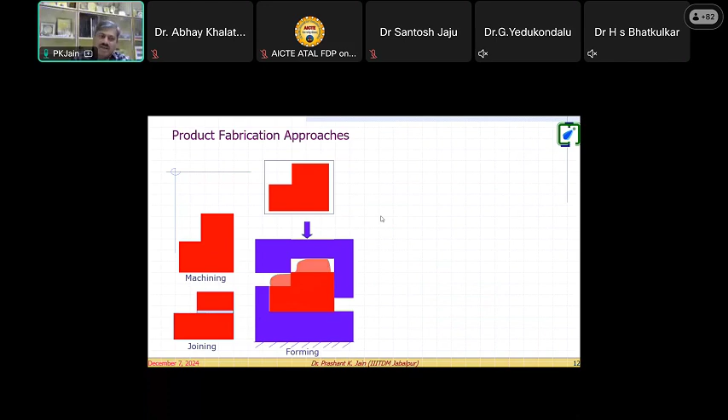We start generally for making any product. Suppose this kind of product is there. Quickly, by looking at this picture, we understand that this may require machining. So immediately the first impression is machining. Then we think this product can also be made by joining processes, soldering, welding. But the most popular and common one is forming processes like injection molding.

But now we are in the era of additive manufacturing, which initially started with layer deposition, which we called rapid prototyping. Then the most widely acceptable technical name came: additive manufacturing. Now it's also known as 3D printing. Mostly this doesn't require any engineering background - food printing, tissue engineering, many things. So not necessarily an engineer, but 3D printing is known to everyone.

So why do we go for additive manufacturing? That process allows us to quickly build a 3D model. You've already gone through this, and here is one example - this is a handpiece of a hair dryer gun. See otherwise how many drawing sheets and dimensions are required to be transferred to develop an injection molding die to create this part.

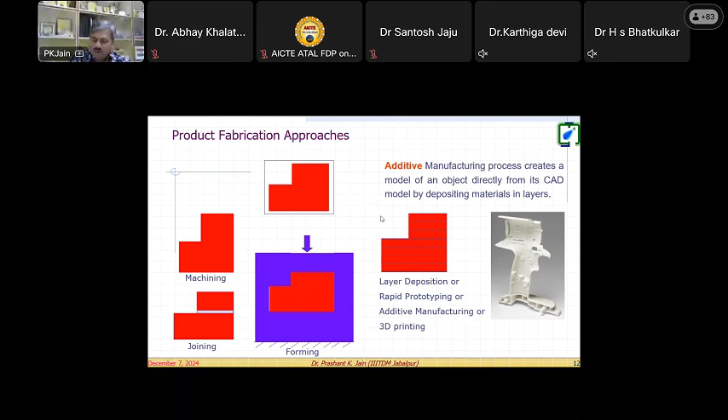Initially, when I started my PhD in 2005, this was just a communication tool to communicate your geometric model. Often we say pictures can communicate. So we started communicating to the patent office while creating a geometric or physical model, to say: okay, this is the product we are going to have a patent for.

In case of additive, the counter thing is subtractive machining. So what is there in subtractive? We are removing the material. In subtractive processes, we begin with a solid stock and carefully remove material. But the process may sometimes be very complex, exhaustive, time consuming, and the material may be very costly, so we may not even be able to build the part - see, for example, this case.

In this case, you can notice that in such areas CNC machining is not possible. Here too, CNC machining is not possible - your 5-axis CNC machine tool cannot even reach this area. So this is the removal process, and this is the additive process. Generally in such cases, we prefer to go for additive processes.

I believe during the previous lectures you've already gone through the different kinds of additive manufacturing processes. Somebody can answer these questions in the chat box, keep on writing. So I'm coming back to additive manufacturing.

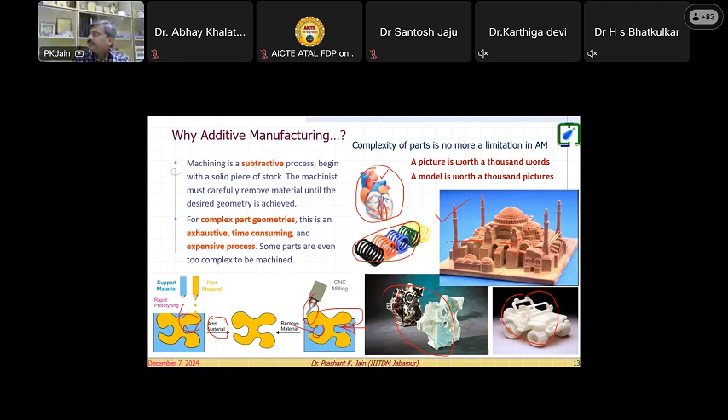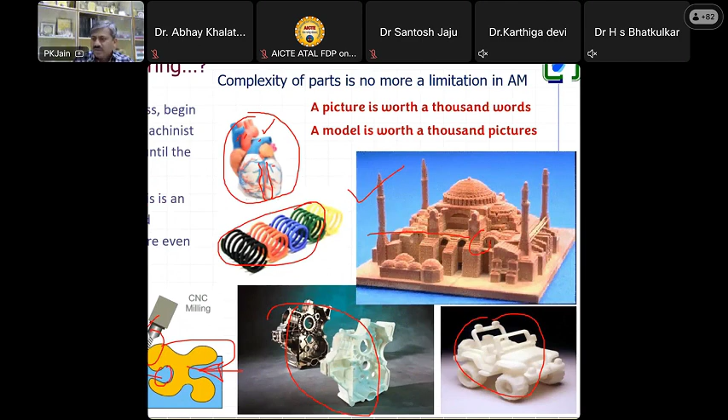So here, everything is done in a layered way. You want a cross section of an object - that is what a layer is. Like here, you can see these layers, and the stair-stepping effects you can see. Right? You can see this layer found on this object.

So we will start with the basics, where you can understand where the scope for programming is required, and why it is required. Look here, initially you want this CAD model, right?

So this model, Dr. Khalatkar, our participants are allowed to write comments. I would like to know who is using AutoCAD or Pro, or which geometric modeling software you are using. Yeah, one is Fusion 360. Please keep going, Muthu Kumar. Others can write whatever you are using - CATIA, Pro E, SolidWorks, very nice.

So here you see this CAD model is required to be created in any of the solid modeling packages - that may be SolidWorks, Fusion 360, AutoCAD, ZWCAD, Solid Edge, or CATIA.

Now the second step is slicing of the model. Slicing means you need to cut this model. This model cannot be cut by a knife because it's a virtual model - it is in a computer. It is a mathematical model available in your computer system.

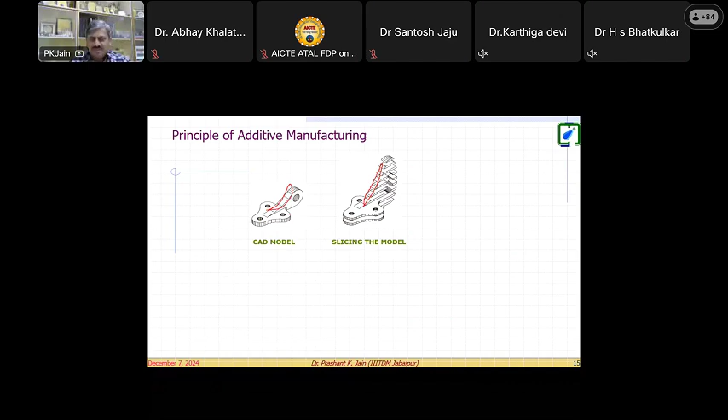So notice here, these are the tapered edges coming. These tapered edges occur because this model has a sculptured surface, so we need to square them. Now you see here all the layers are in a cuboid form, a prismatic form.

Once we get these kinds of prismatic forms, the layers mean this contour information. So suppose I select this area or this area, you get this kind of contour information. This contour information is required to be stored in your computer system - that is the objective we have to fulfill.

This is one contour at this side, here is a different contour, here is a different contour, and then successive layers - as we keep moving in the Z direction, upward direction, this movement occurs and the contour keeps changing. Our objective is to find out this contour, okay?

Then we will move to the nozzle path - I am coming to the process. So next step, once you get this prismatic information, you need to join them. Pasting is required - we call it stacking or pasting, okay?

Then you have the physical prototype, and this physical prototype will be in this form. What happens - you started with this CAD model, very smooth, but you end up with this staircase model. So what is happening? These stairs are an inherent characteristic of the process, because everything is done with layers. So any layer will be in a prismatic form, a cuboid form, so stairs will be generated.

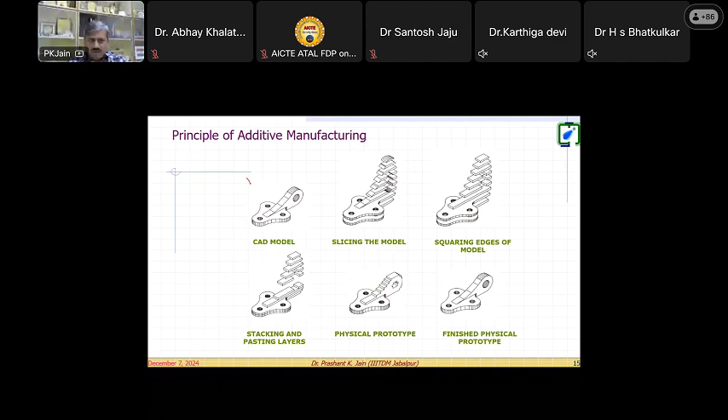Now see, because your desired model was this, but you are receiving this, so you have to move to post processing - a lot of grinding, surface finish, polishing, or some other things like selective melting. Dr. Taufik might have discussed with you the selective melting processes to get this model. So our objective is to get this finished physical prototype after the post processing.

So let me come to the process here. What we have done - we have created the geometric model, then we have done the tessellation. Any idea of the tessellation?

Quickly you can write in the comment box, any idea of the tessellation? What is the tessellation? Okay, STL file, okay, anybody else? Tiling, okay, anybody else? Sudhir - tiling, okay. Triangles, okay. So basically the triangles or STL file is the output, you can say, or the presentable form of the tessellation.

Tessellation basically tells you the piecewise approximation of the surfaces. Suppose this is the cube you have, and we piecewise approximate it. This surface can be anything - triangle, square, pentagon, hexagon, or anything. But finally we land out with the triangle. Why? Because the triangle is the simplest geometry, the lowest side plane. To create a plane, what we require is three points. We can also have other shapes, but for the minimum plane to cover maximum volume, it's the triangle. So that's why piecewise approximation is done using triangles.

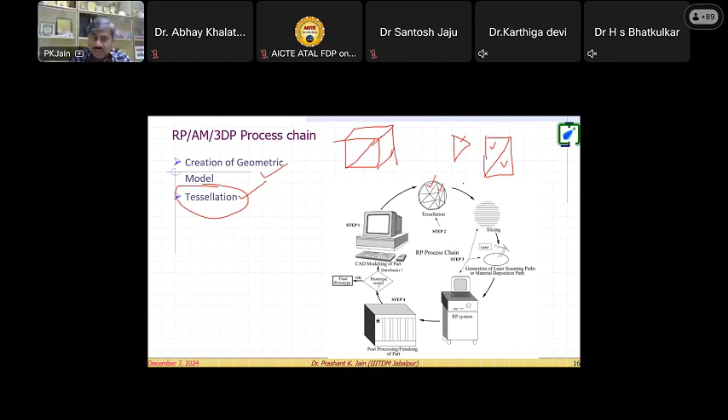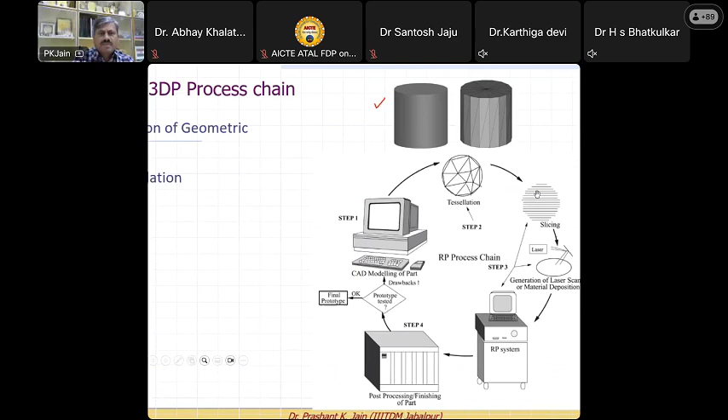The piecewise approximation of the surface - you can see this cylinder and another cylinder. What is happening here? You have a smooth cylinder with curved surfaces, but here what happens is just like you imagine you have a knife in your hand and you are peeling off a potato or an apple, and you are converting the spherical surfaces into planar sections. So there are planar sections and every section is represented by a triangle. In this case, this surface could also be represented by a rectangle, no issues, but still we use the triangle because the file format says triangle.

I will show you at the end of the session - we are working on developing a newest format which does not necessarily require triangles. We can use any shape of geometric model. We will take that up, or I can also take it right now.

So that is the tessellation. Then we need to do the slicing. Actually, our ultimate objective is to get the slicing. This tessellation is basically providing how to do the slicing - it's just a facilitation for the slicing to be done.

If you take this plane cross section, the equation will be very difficult because you have to deal with the equation of a cylinder, or it can be anything - you can have a mouse product or any typical product. Once it is in surface form, there are many things to do and the equation may be complex. But once you reach the STL file or tessellation stage, the equation reduces to an equation of a plane and another plane, and this other plane itself is in the form of a triangle.

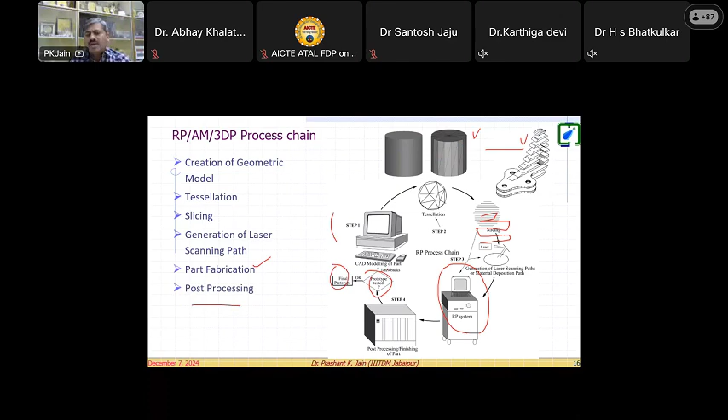This part, how to proceed for tessellation, I will take up a little later. The next step after tessellation is slicing, which you achieve with tessellation - tessellation is not a necessary part of the process chain, we do it just to facilitate or ease the slicing procedure. Then after slicing, we generate the laser scanning path, like this. Then we have to print the part on the RP system, and then do some post-processing to get the final product. Then we check for dimensions, accuracy, surface finish, orientation, and many other things. So this is the way we proceed with the process chain, whatever we call rapid prototyping, AM, additive manufacturing, or 3D printing.

Now see how this is going to be implemented - that is the main part. So you see this part, I have geometric modeling done in Pro E. Now you can see within this part also, I have taken some kind of surface. This geometry inside is a hollow portion, and inside this is also a hollow portion, different.

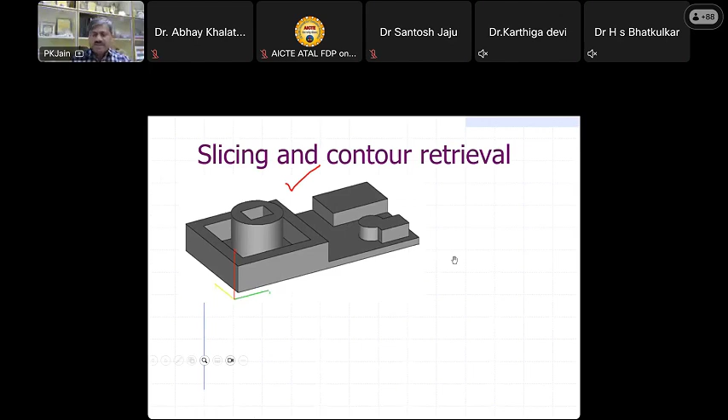Now we will convert this into the STL. See, this is the conversion of the STL file. Did you notice it? All our triangles are here in this file. You see here all the triangles, and in these triangles also you notice the planar section - on this top surface you will notice there are only two triangles, because they are sufficient to represent the surface. But you see in the cylindrical part, what is happening? So many triangles are there, here also so many triangles, because every surface is to be converted into the planar section.

The requirement is not the triangle, but the requirement is only the planar section, and that planar section we are representing with triangles. So you see here, if we increase the number of triangles, what is going to happen? We are more close to the required geometry. If fewer triangles are there, a lot of volumetric loss will be there, and we may lose the original designer intent - that is the issue with that.

Okay, now we go for this plane. Can you notice here in this plane what we have done? Here you can see the blue color dots. Can anybody say what these blue color dots are showing in this picture? Can you see the zoomed portion of my screen?

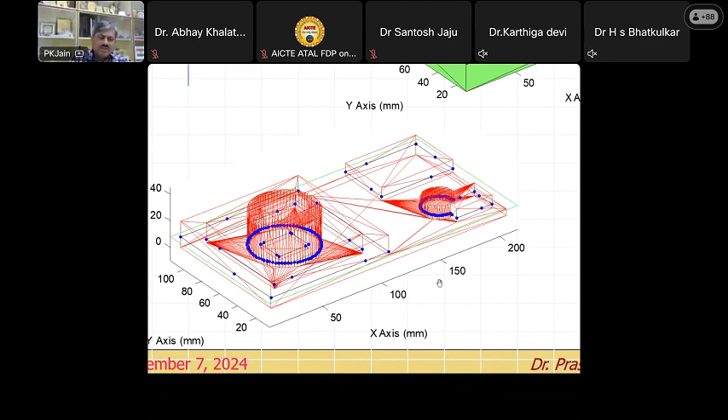Okay, so these are the points, intersection points we got from the STL file. Now what we will do, we will plot these points. You see here the result is this. Because all these STL files, all these triangles are in a random way, they are not in some sequence. I will show you one STL file a little later.

Anybody have opened the STL file in Notepad? Say yes or no. STL file opened in Notepad or WordPad? Muthukumar says yes. Anybody else? Yes, very nice. Have you developed any kind of... Nilesh, yeah, Notepad, okay very nice. Have you developed any kind of MATLAB program or Python program to read that STL file?

Reading that STL file in MATLAB or Python? No, okay. So you see here, the next task is to connect all these points in a logical sequence, so this information can be used for further processing. Right now it is not in a useful way.

So now you see here, can you notice? In this case the blue color is showing the external contour, the red color dotted line is showing the internal contour, again external contour, again internal contour. These are only external contours. And you can relate it also with this figure. If I cut this point at 8mm height, what you will receive? This portion, external contour, internal contour, like this. This information is required for us that can be used for our 3D printing machine.

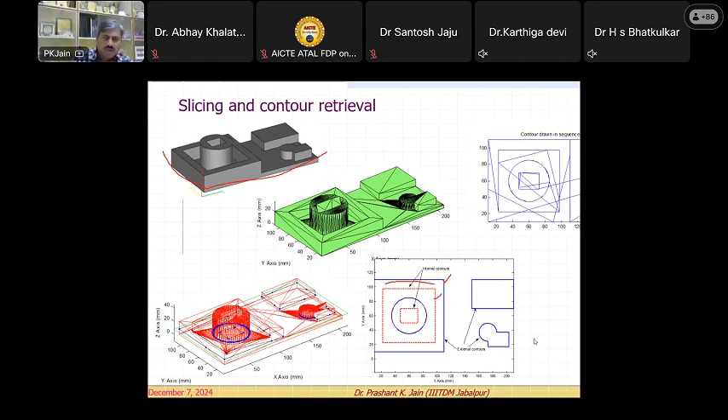So here you see the next step is to generate the nozzle path, whatever we have seen here. So what does nozzle path mean? This portion you want to be solidified, right? Here no solidification, here again you want the solidification, similarly here you want the solidification, here you want the solidification. You can relate with this object.

Okay, so we will reach to the G code. How to generate? Dr. Muthu Kumar, how have you generated the G code? By your own or through Cura or FlashForge or Magics? Okay, you generated through Cura, very nice. We will discuss how you can get your G code by using MATLAB. Yeah, KISS slicer is also very good.

So see, this part has to be solidified. Once you take this geometric model, you can take it to KISS slicer, Cura, FlashForge or anything else and you can get the G code. Very nice, right? Now, after that G code, if you want some more modifications, if you are good in doing 3D printing, I would request you, if allowed to unmute, discuss your ongoing research problems, what you are doing, so this programming information can be helpful for you. Next 15-20 minutes I will take you to the programming, then you can open up for discussion.

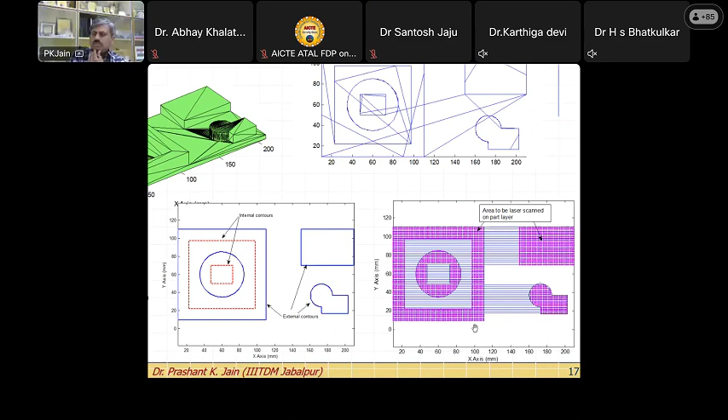Okay, so you know FDM, you know SLS process. Now see what we can take up here. Suppose I draw a line. So here is the first intersection - I can inform the machine that the laser has to be switched on. At the second intersection, I can tell the machine the laser has to be switched off, right? Similarly, at the next intersection point, again switch on, switch off. On, off, on, off, and in this way you can tell your machine, and this logic you can convert into G code information - where the laser has to be switched on and where it has to be switched off, and the laser will go up to this point and then come back, following the same thing. So we can think in a logical way.

I hope you can tell everybody, how many of you have gone through MATLAB? First, my basic question - programming anything. Have you done some work with the do loop, for loop, if loop, switch statement, these kind of basic things? At least 5 responses, yes or no, anything. So that can be, I will take up the discussion up to that level. Yeah, Dr. Anil Sahu, Dr. Gururaj Bowler, 3 responses.

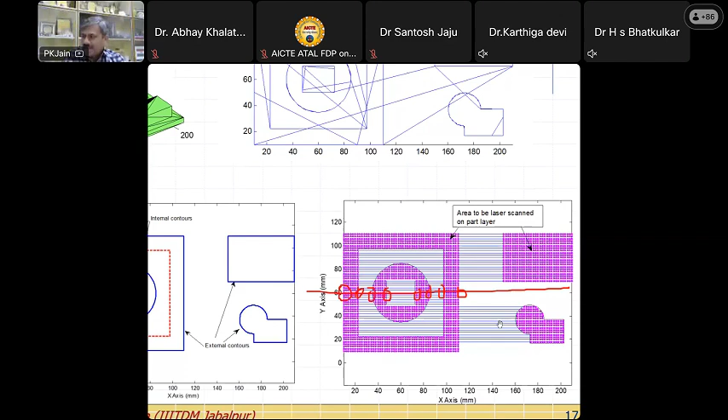Okay, so in this way we are going to convert into the program, right? Now, Priya Ranjan, no, 4 responses. I'm waiting for one more. In the meantime, have you gone through this Magics software?

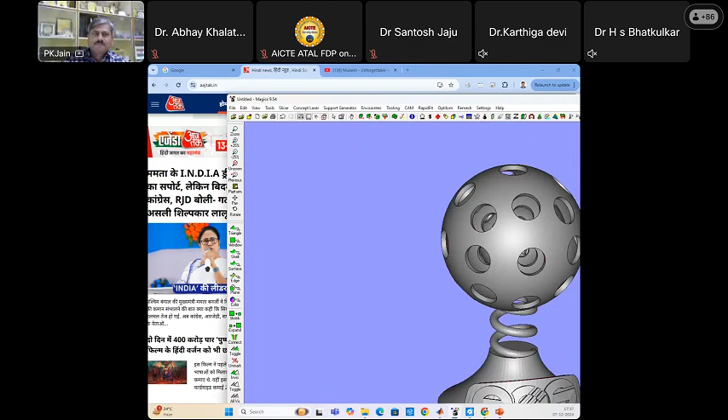Okay, Magics - no. Let me take you briefly directly to the software itself. I am just taking you to the software screen. Can you see now the software screen? I'm moving from this monitor to another. Yeah, thank you, Dr. Rupesh. Okay, now you can see on the screen the Magics software, right?

So, like other software, we have many tools here. This is just the Materialise software. You remember you are using the Mimics software - Mimics and Magics both are from Materialise. We have the license for both Magics and Mimics available in our laboratory at IIITDM Jabalpur.

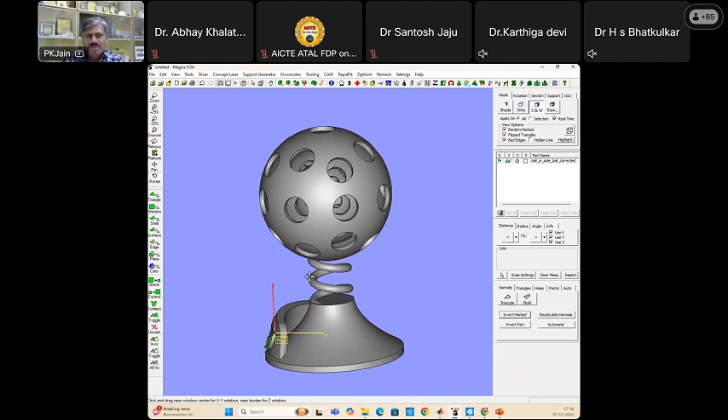Now look at this part - 3 spheres inside, right? I will show you one video of the SLS process so you can relate it. And there is no joint, right? This kind of application we require for biomedical applications as well. So look at here - now what is there?

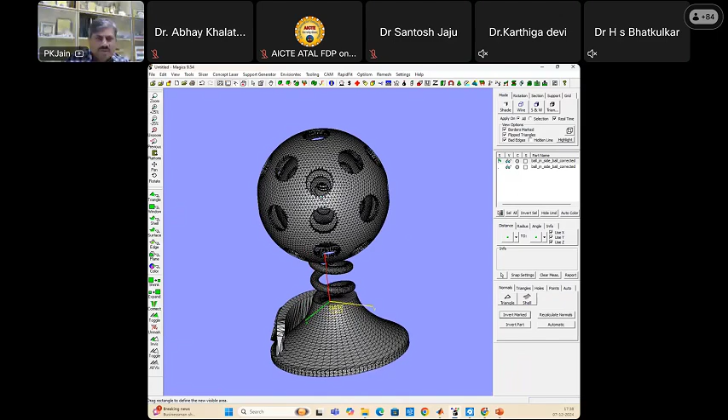Let me put it in a triangular way. Can you see everything is now converted into the form of triangles? Right, look at this - everything is in the form of triangles. Let me give you a zoom picture. Now see, everything is triangles, but depending on where the triangles are required, there are fewer or more triangles. Like you can see in this vertical one, how small the triangles are. Here are the triangles, right?

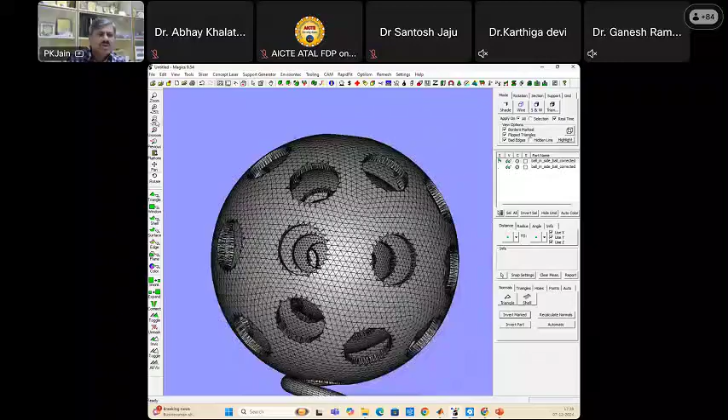Our next - you remember what has happened? The software has done the tessellation for you, okay? Our objective is to get the contour information. Let me show you. Right, this is what the STL file looks like in the software. Any STL viewer you can use for this purpose.

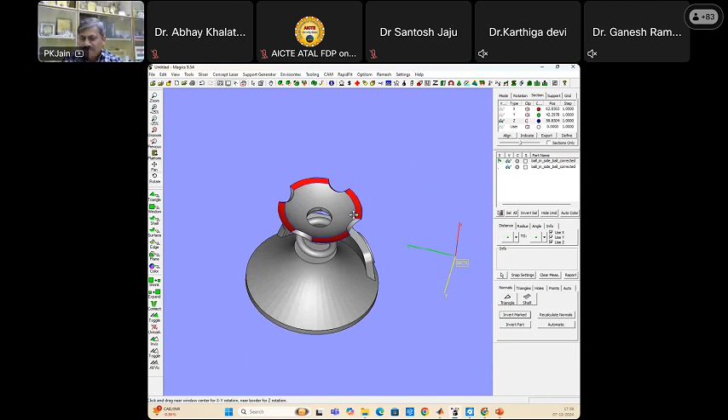Okay, now let me convert this so you can see it. Now look at this - if I show you the section, can you notice here, this is the sectional view. This red color, can you see here? This red color means in this portion, this much material has to be solidified. If we want this much material solidified, what exactly do we need to supply to our machine? And you talked about the G code - what G code is required at this level? You require these 4 red color contours - 4 separate contours are there.

Or let me put it at the more bottom side. See at the initial contour - it will be this kind of circle that needs to be solidified. So you are generating a nozzle path to fill this circle, and this information will go to your 3D printing machine in the form of G code. The same G code we use to run the CNC machine. Only difference is that for CNC machine our approach is from top to down, and here bottom to up, because we are depositing material from bottom to up.

Now look at this - the moment I move it in the vertical direction, see here the cross section changes. At this stage only this much portion of the spring part is solidified, remaining is unsolidified. See here, at this first sphere and the second sphere, both are printing together, and there is a clear cut gap between the first sphere and the second sphere. How will this be supported in this case? Have you gone through the SLS process? Can anybody answer quickly - how will the second sphere stay in its position, printed separately from the first sphere?

Unsintered powder will remain in its position, and that unsintered powder will provide support to the second sphere.

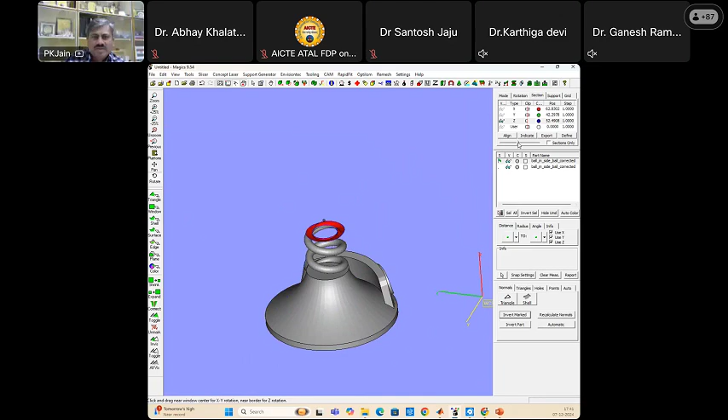Very nice, thank you Dr. Sudeep. Okay, so see the movement, we will come upward. The first sphere, second, now the third sphere will start building, the fourth sphere, fifth sphere, like this, up to the final. Remember, if we are here in this portion.

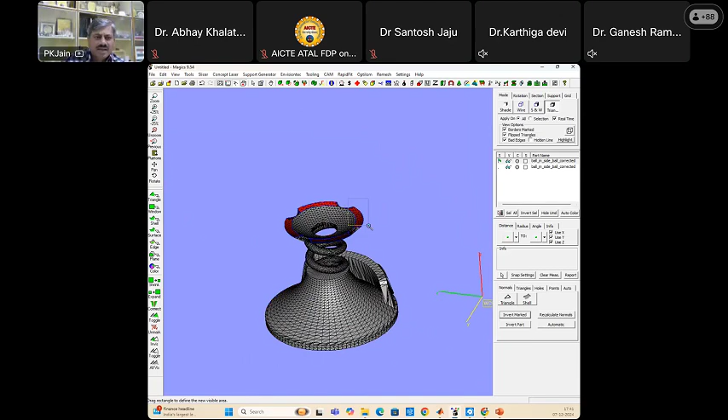Okay, now look at this. If I go and show you the triangles, you see over here these triangles are now part of the intersection point we have to collect. From those intersection points, we have to join them in a logical sequence to convert them into triangular contour information.

That will give you the contour information. So this is the way how your Magics software, or any other software, works to get the contour. Remember, what is required here: we want contour information. How do we generate it, how do we supply it? Have you heard about the CLI file?

Common layer interface file, anybody? I hope now you can see my PPT on the screen. Anybody, any idea of the CLI file? So you see this screen, the cut cross-sectional views I have shown you, and you need to know a lot of manipulation with the STL file, which I have shown you.

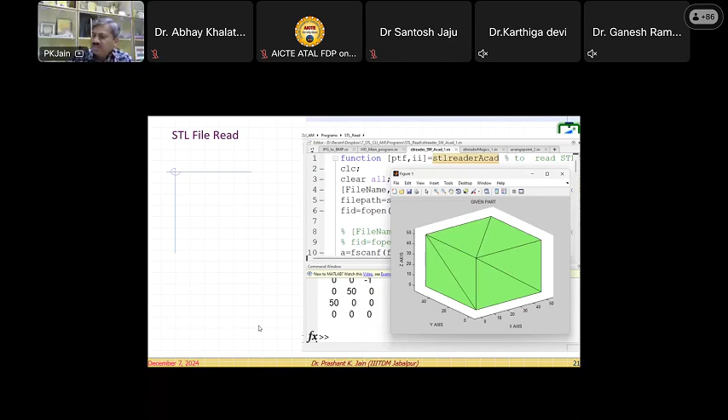Okay, then we are coming to the STL read. I will show you this again in MATLAB. So anyone have any idea how the contour information, or layer information, or SLI file slice layer information, is supplied to the 3D printing machine? I'm not talking about this simple Flashforge kind of printer, but for say, EOS machines, the big machines which use powder based systems.

Okay, let me show you one powder-based machine also. Can you see this screen? Can you hear the sound as well?

No. Okay, sound is not transferring. Well, okay, I will explain. Let me mute also so I can talk.

I hope this SLS process video you have gone through. This is a selective laser sintering process, and you can see powder is sintered by the laser. Inside there are infrared heaters which do the preheating process, and the remaining 4-5 degree centigrade temperature rise occurs because of the laser. So you can see here the laser reflection is coming because we have done this experiment with mixing of nano clay. So because of the nano clay, this is reflective. Otherwise, it's a simple polymer, polyamide 2200.

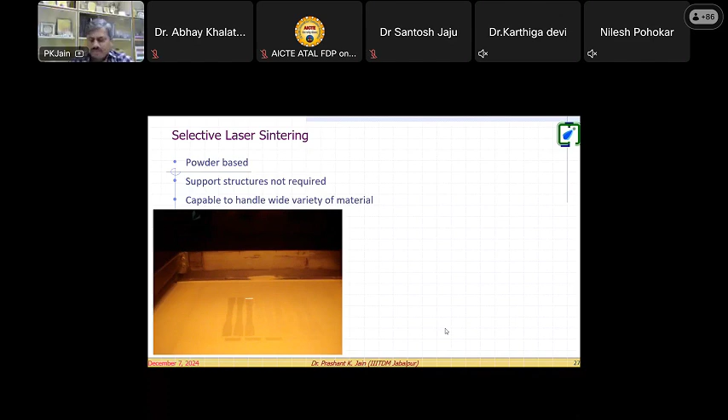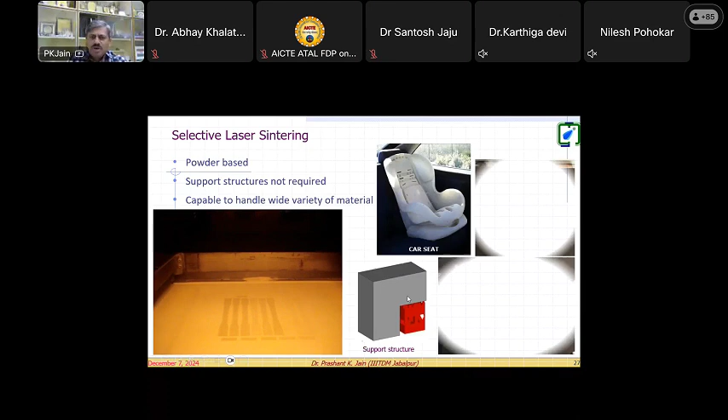Right, so we've gone through this. I assume SLS process is very well known to you. Powder based, support is not required, and now this has reached to metal 3D printing. Here, suppose the powder is 150 micron, and here is 20 micron steel powder. Again, the neck forming tendency is there. You see here, otherwise these kind of complex parts are not possible.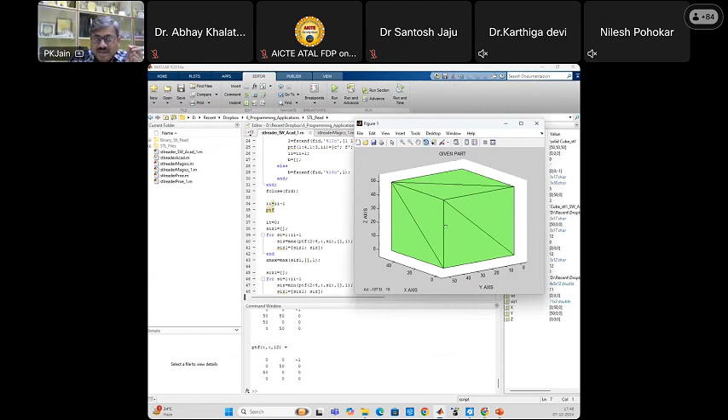Total faces are 6 in a cube. Because every face is now converted into triangles, there are 12 triangles total. Total 8 vertices, but this STL file will have 36 vertices because for the 12 triangles, every triangle will have 3 vertices.

Now see what happened in the command prompt. For every triangle, whatever variable I have given. Can you recall what it is showing? The first row is the normal to the facet, and the next lines are x1,y1,z1 for the first, second, and third vertex, right? So all the 12 triangles' information in a mathematical form is now available with us.

The next step is to get the intersection of this file with triangles, right? Let me take you through it, then I will go back to the PPT a little later. So this is one.

Now remember, if I open this file, this is the cube I have taken. Now let me take this file. Let me open another file. Let me go back to some other file, from Dropbox. Let me open this file.

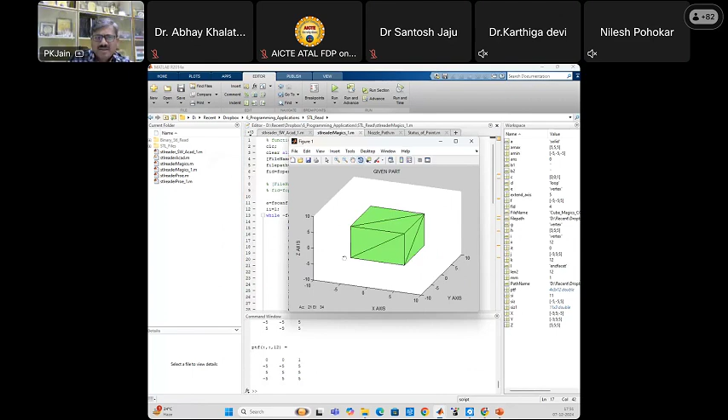Can anybody tell me what may be the reason? I'm using two different MATLAB programs to read those two STL files, and the same data is again recovered.

The reason is here, anybody wants to type something? You type, or else I will continue. So the reason is, you see here, two different things.

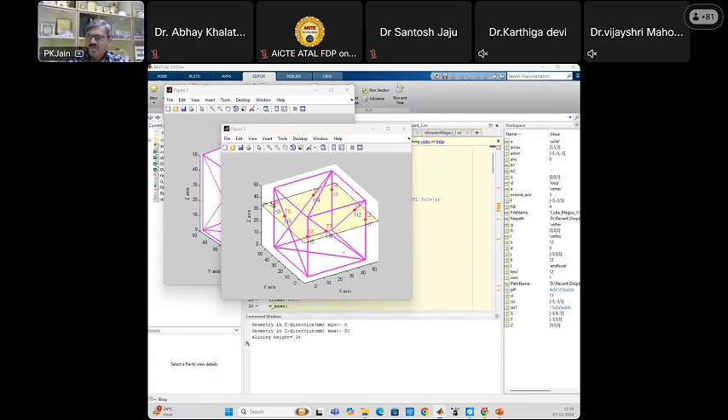See here, this is going to be the STL file, this is the contour information, and this is the contour connected in a logical way. I hope you can see all three figures here. This is the STL file - only the lines are representing. And what is our objective?

To take a plane - you see, this plane is taken at 34 height. You can see here the value I have is 34. At 34, it is calculating all these cross sections. And in these cross sections, when we take one triangle, everywhere we put the concept of tail and head - so T7 and H7.

So H7 is the head and this is the tail. In this way, for these triangles we got the intersection point, and what we receive is a line. Now the next question comes - how to connect these lines? They are not in sequence. Your program can read this first, then this, then move to this side, and this can be the second.

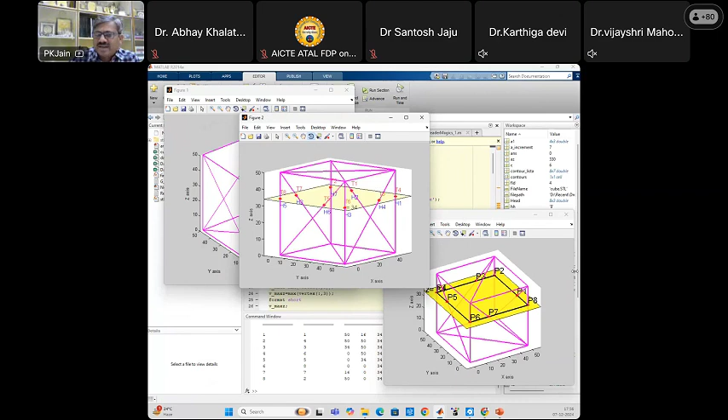So what is required? We have to connect them in a logical sequence - P1, P2, P3, and then we number them P1, P2, P3. This information we are going to write in a CLI file.

I have told you about this - does anybody know about the CLI file? Please write yes or no. CLI file or SLI? I come to know that STL file is known to you very well. Very nice, very good, course going on.

So I will take you to the SLI file. Any reply? And in between, if you want to ask anything about this programming, how we developed the logic or how we connected these points...

You see here on the database itself, segment 1, 2, 3 - this is the way we receive the segment, with tail and head. And this is now rearranged - the new segment. This old segment connected to the fourth point, then the third segment, sixth segment, fifth segment - this is the new segment. So now this is connected to 50 50 34. Now 50 50 34 is connected to 34 50. This 34 50 is now connected to 0 50. This 0 50 is now connected to 0 34.

Okay, so I'm coming back to the PPT again. This is the way we are exporting the STL file from the different softwares. Let me take you to the next.

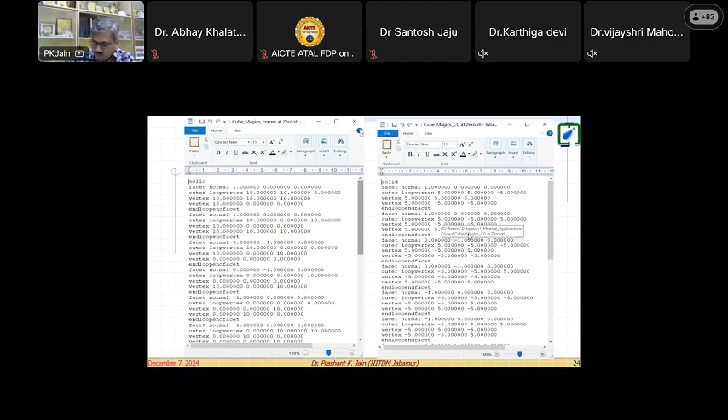So this is again with a different center. Here I have taken the center as the cube center at origin. So everywhere, because the unit size is 10, we got 10, 5, 5, 5, and here the cube is centered at the origin 0. So everywhere we receive this.

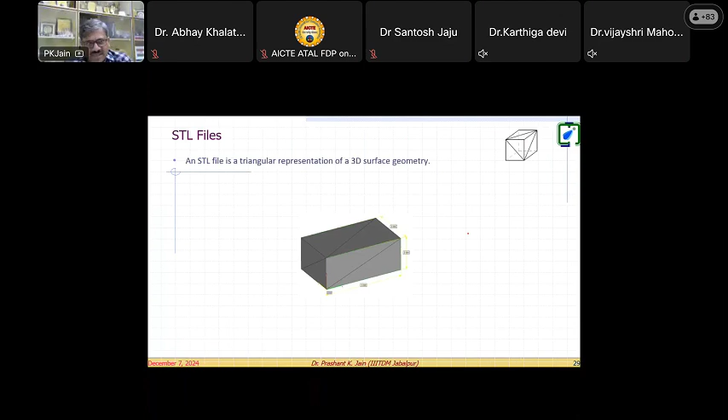Okay, now coming to the STL file - I hope you have gone through it very well. Say yes or no, so I can skip the STL file introduction and various consistency rules, and then we will jump again to the programming part, how to generate the nozzle path again.

How to manipulate the STL file. So, do you know this, or is this your question?

Since we've gone through the STL file, one triangle - you see there are some consistency rules we can recheck, like the number of faces must be even, and the number of edges must be a multiple of 3. Then 2 times the number of edges must equal 3 times the number of faces. Based on this, the requirement of an STL file is that it should be a closed volume - there should be no hole, no puncture. I am coming to that.

So this is the STL file you got. Let me take you quickly through it. This is how you vary the number of triangles - the same geometry, both geometries are the same, but it has lost the designer's intent. It becomes the planar section, and here the number of triangles is very high, and you can see how the number of triangles is varying. Okay, now you see how you export the parameters.

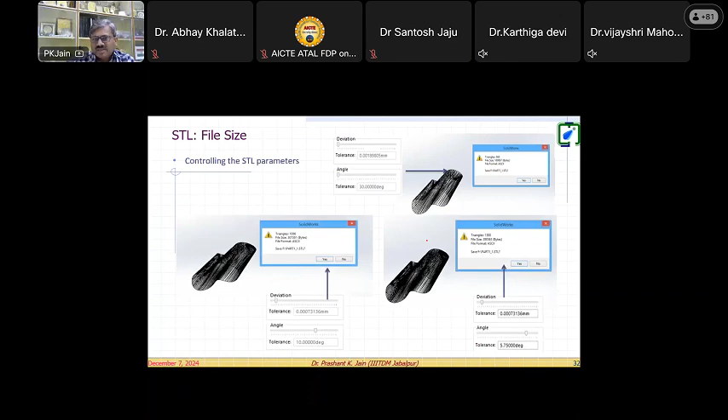So two things you control - the chordal and the angle control. Based on this, you decide how many triangles are generated. You cannot control the exact number, but the point is, depending on this, the file size will keep on increasing, the memory size requirement will keep on increasing, and the computational complexity will keep on increasing. So this is how the STL file variation can be done in different geometry by different parameters. This screen I have shown you is SolidWorks.

Those who have already worked with SolidWorks can check how to export the STL file and control these parameters. Now coming to the bad STL - what happens when you work with these small printers? Everything seems very fine, you can have a geometric model, give it to Cura or a slicer, and generate.

But many times when you try to print a typical part, a lot of errors come. The errors are like this - our STL file has to be in this way, this is normal, right? And these fingers will show you the way the vertices are written in a counterclockwise manner, like this.

If this rule is not followed, you will not be able to identify whether the contour is internal or external. And I hope you know the importance of identifying internal and external contour - say yes or no. Any model, any part will be solidified between the external to internal.

But if you reverse this, your machine will print something else. And if you do this mistake on every layer, you can get something else - your part will not be printed.

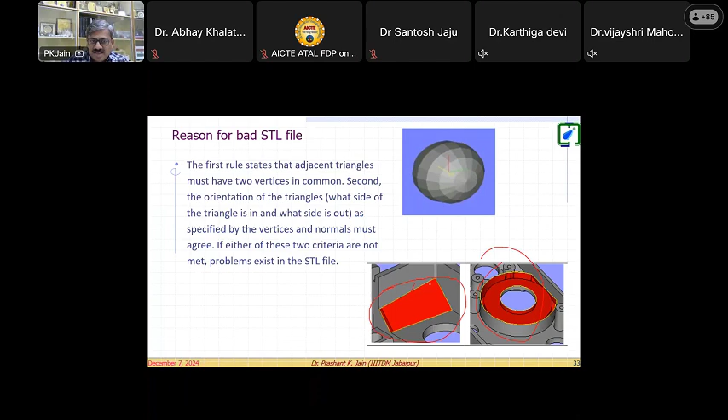So see here, this kind of defect will be there. Like this, the triangles are missing, right? So these triangles are not available - this has become a hole.

And these problems are mainly divided into 4 parts. The first problem we will discuss today - the gap, the crack, the hole, the puncture - are basically known as the missing facet. Missing facet means what?

Let me show you the missing facet first. Let me take you to missing facet one. Okay, let me open a new file. See this file, STL crack repair. Let me open and run first, then I will explain how we are doing this.

One missing facet - what is the meaning of the missing facet? Be clear. Look at this here. Earlier I have shown you the triangle, sorry, cube - everywhere you got the 12 faces, right? You answered very well, 12 faces. Now, how many facets are in this cube?

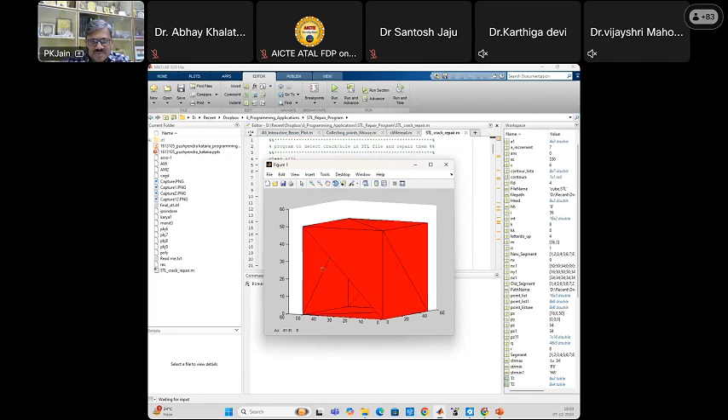Did you find that one facet is missing? Anyone? So how many faces are in this cube? Can you see here the front? I am rolling it - you find it, one triangle is missing.

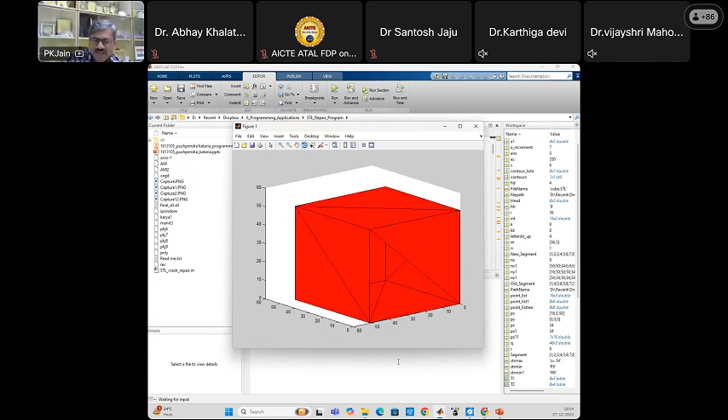Can anyone propose some logic, tell me, so you can count that one triangle is missing? You remember I have shown you the program where we read the STL file of the cube and it is showing you the file. You remember we have read one STL file and it's showing you how many triangles are there - you have already seen on the screen that there were 12 triangles shown.

So if you know this is a cube, you can count manually that there should be 12 triangles. But if you take any other file, you don't know how many triangles should be there - so the number is not known. Your software, your program has to go and check there should not be any hole or anything missing.

So in this way we proceed, like for gaps and punctures. So see what happens, how these missing facets or gaps can come. Look at this - this is the top surface, surface 1, and here it is the vertical surface. So here what happens, very small holes are there, or very small triangles need to be created.

Have you heard about the Delaunay triangulation, or how this triangulation is done, whether it is finite element analysis or any other way? There are a lot of algorithms available for how to do this triangulation - one is the Delaunay triangulation, or the Voronoi diagram we use here.

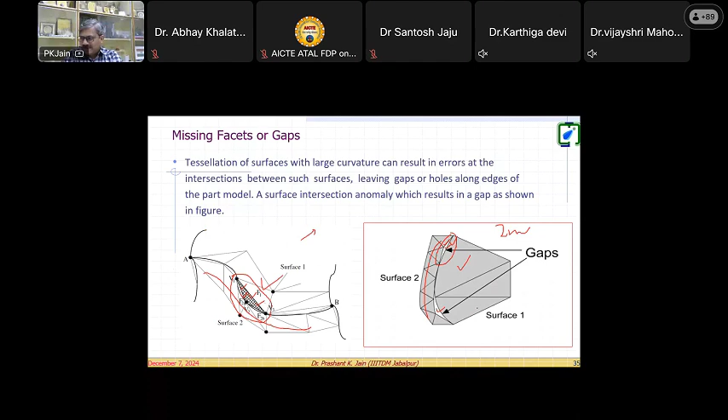Such things may lead to many errors, and the part will not print properly. You'll see a lot of errors will come up, but I'm not going to jump into all such errors. Let me focus only on the missing facet problem.

See, there are two things: one is the valid model and another is the invalid model. What is a valid model? Valid model means no holes, no puncture, no degenerate face, no overlapping, nothing.

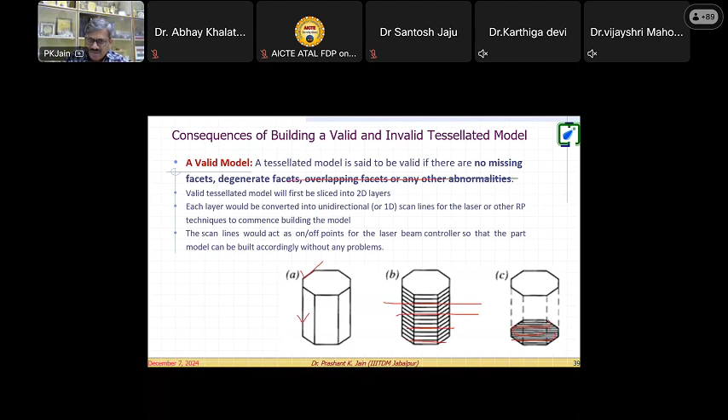So say this is the model you have generated from Pro-E or CATIA. The next step you need to do is this kind of slicing, right? Third step, within this slicing you need to generate this toolpath or the G code, as we said earlier.

Now suppose in a second case, here two triangles are missing. If these triangles are missing, what is going to happen? You will have this information generated, and once you generate it, look at the top view, because there is no triangle, so here no edge is generated.

You see over here, the edge will not be there. Now what happens if you generate the G code from this contour information? There is no edge where the nozzle will go back, so the nozzle will move for an infinite length, and that is the error generated.

That is why the part will not print properly, because now your system will hang up, or I don't know what kind of error it will show on different software platforms, but this will not lead to successful part printing. So here we have to convert any invalid model into a valid model.

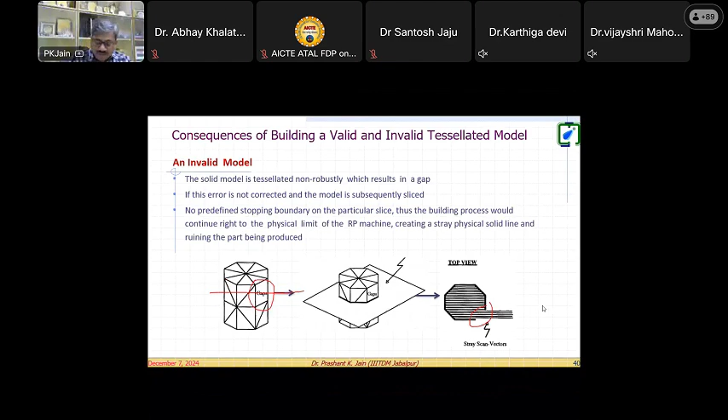Now there is another algorithm to get this. I think I have time up to 6:30. Yes sir, there's a gap. No problem, 5 or 10 minutes is fine. So I'll conclude by 6:30. There's a test actually, we'll give the link and they will solve it later. Since it is the last session, I will try to finish it.

See, this is the gap. Now remember what we have done. I started with a cube, right? So if I take this over here, this will be a triangle.

Now suppose I number it 1, 2, 3, 4. Everybody knows about the STL file, that it shows the normal and the edges. So this will be written like this, in a counterclockwise direction. So the edge will be 1, 2. Next edge will be 2, 3, and next edge will be 3, 1. Is it okay for everyone? Please keep on replying.

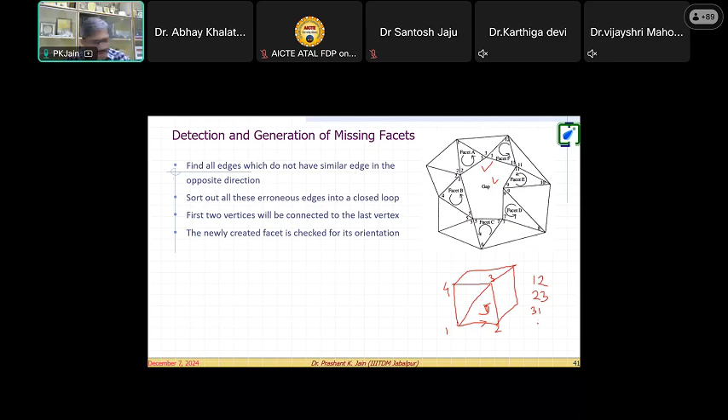Okay, now look at this. What happens if I take this also as counterclockwise? What edges am I going to receive for this triangle B, and this is triangle A? So this is for A, and now let me show what I'm going to receive for B: 1, 3, then 3, 4.

And 4, 1. Now you notice the pattern. This is the common edge. What happens? Within A we received 3, 1, and in B we received 1, 3. So this is the common edge, but written in a different way. Here it is 3, 1, and in this triangle it is written as 1, 3.

This means, if it is a valid solid, we assume all facets are available, nothing is deleted. So if we check for all 12 facets, we can store them in another separate file. Every edge will have its counterpart.

Suppose this 1, 2 is there. So from the bottom there will be another edge and you will receive 2, 1. Is that clear? Every edge in an STL file, if it is valid, meaning complete, no puncture, no hole, will have a counterpart.

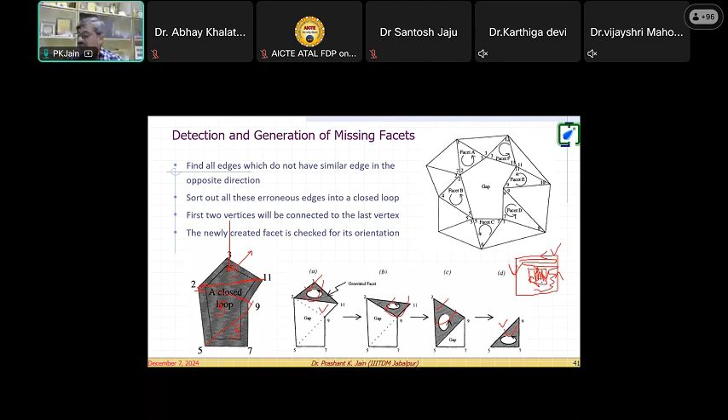So first you have filled this gap. Now your STL file will become foolproof, right? Now look at this here.

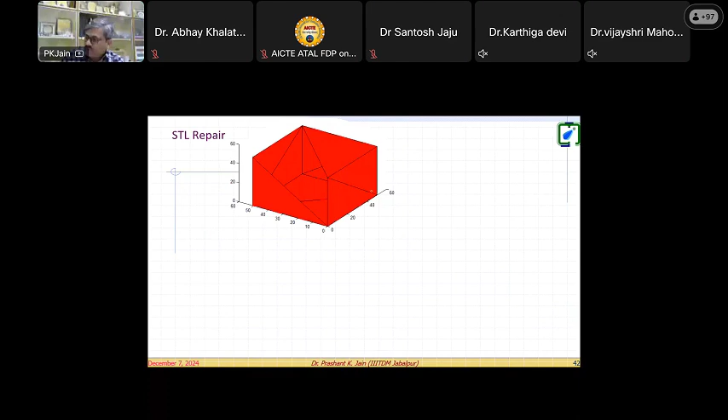How many facets are missing in this? Anyone on the screen, how many facets are missing? Can you identify? Two. Thank you. Like this, now we have filled it.

But you see here, it is not correct because there is no way to get the designer's intent. But here you see the normals are intersecting with each other, pointing towards each other, right? So this contour is wrong, meaning the clockwise or counterclockwise is something wrong.

Now see in this case, this edge is coming like this, and here this edge is coming like this. So this face is just like, you see? Let me show you the MATLAB program.

Let us run the STL crack repair file. First we'll complete this. This time I will open the same file with two facets missing. STL2 missing facets. This is just some sample file I have created for quick discussion.

So you can see this STL file, the same STL file I have shown you how it looks if you open it in notepad. So you see the two facets are missing.

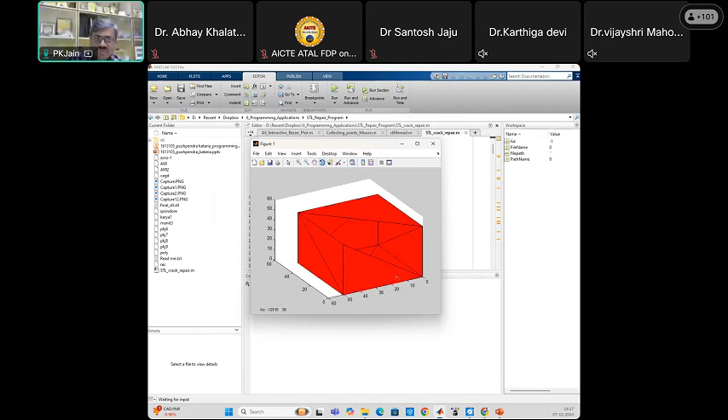Now see here, the program is asking to press 0 to fill the hole. So let me put the 0. Something error - oh sorry, I think instead of 0, I pressed the O.

Okay, now press 1 to correct the orientation, 2 to generate the text file respectively. We can have a new text file.

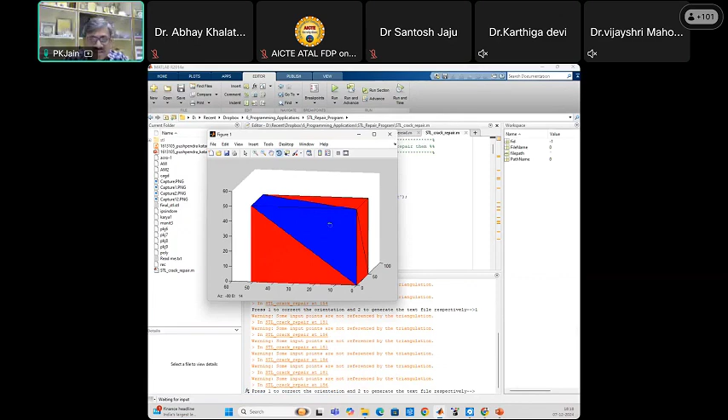Now see the orientation is okay. This program will tell you, you can write this file back to the same STL file. Because now you know how the STL file is written, you can type it. So you can ask your program to type 2 more triangles in the same STL file and save it again. Let me put it GHRCE.

The new file name, sorry, first let me give 2. Asking for the new file name GHRCE. You can see on the right the current folder, I hope you know MATLAB. So you see in the current folder there is no GHRCE file yet. Let me put this file. The new file is generated, GHR, this one, right?

Let us open this file in the editor. Now you see here, solid corrected file by PK Jain, the facet normal like this. You see here, now this file contains the complete 12 triangles. Earlier there were only 10 triangles, 2 were missing. So this you have to do in the program by your own.

So you see this program is written. If you want anything, what we have done, I will be happy to share which line represents what. So this is the STL repair. Now since we have done this repair, the file is generated. Now we can move to generate the nozzle path.

We will move to the slicing first, right? So this is the cube file. Let me go back to the slicing. Repairing done. Now we are going for slicing. Let us run the slice. The entire additive manufacturing cycle I am trying to show you, okay?

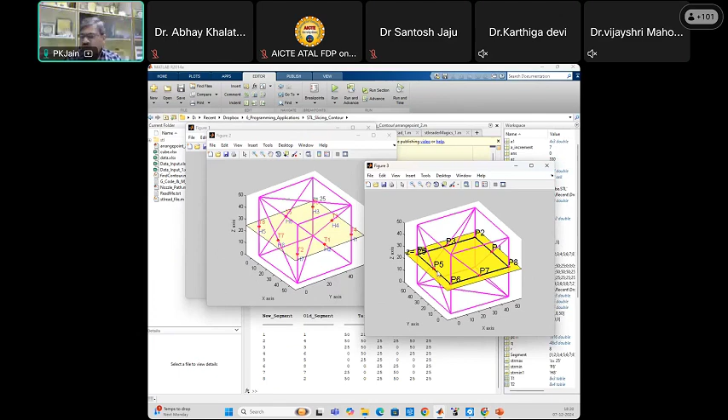If you have any question, you can please keep on typing here, okay? So you see, this is the contour information you got at 25, right? You know, you can put the for loop and get the successive information, right? I'm not going into that at this moment, okay?

So you see this information. Now this information is written into the file. So these intersection points are written. Let me also check where. We have written this in the XLS, right? Data.xls. Let me open it outside MATLAB. So you can see this is the Excel file, and you see this information. These points are written in this Excel, right?

Now we developed another program to generate the G code. Okay, this G code M code text. Let me delete this G code M code text. I have deleted it. This is the nozzle path file.

Let us run this nozzle path file. Okay, so this is the nozzle path file. This will go and read this file, XLS read. We have written the data from the slicing program just to keep the size in our control, in the data.xls. Now it will go and open the data XLS file, and once it is open, it will read and generate the nozzle path. Let me go back and close all of them.

So let us run this nozzle path. Okay, now look at this at the bottom. It is asking input size. Let me give 5. The temperature at which the bed needs to be heated initially, let me say 200. Temperature at which the nozzle needs to be heated initially, let me say 180. And you see over here, the nozzle path is generated. Got it? We have taken the step size 5. So this is the nozzle path generated.

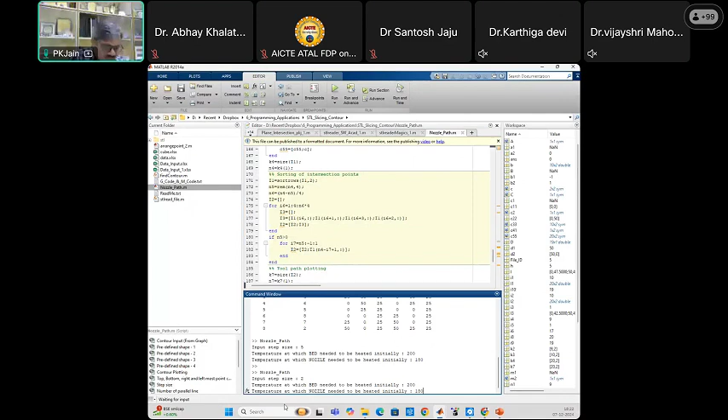If you want to see it again, let me run it again. It is again asking for input size. This time instead of 5, let me put 2. The temperature 200, 180. See, it is generating the nozzle path. You can see on the screen itself.

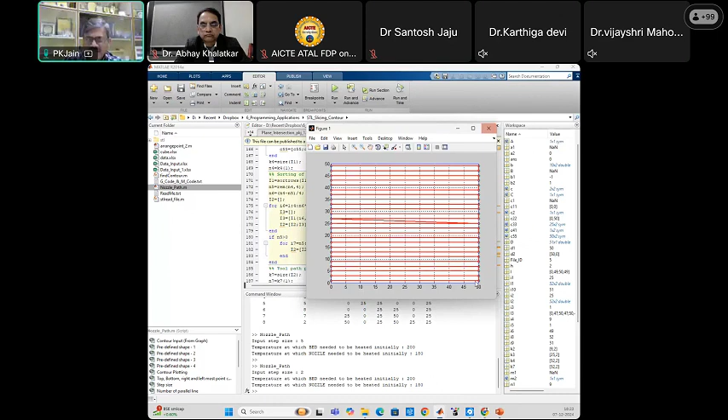Right now, this nozzle path is generated, and this information does not stop here. What we have done is this information has to be written in the form of G code and M code. So you see here, this file I have deleted. Now let me open it again.

New file is generated. Now, the information you have generated and supplied to the machine, in the form of G code, you can see here G code M code for 3D printer nozzle path. M140, this is the temperature we have given, 200, 180, G28, G, everything. Whatever information you generated in the form of coordinates, now everything is written into this form. This file you can directly give to your 3D printer. You don't need any slicer, any KISS slicer, Cura, Magics, or anything, right? This is the way you reached this point.

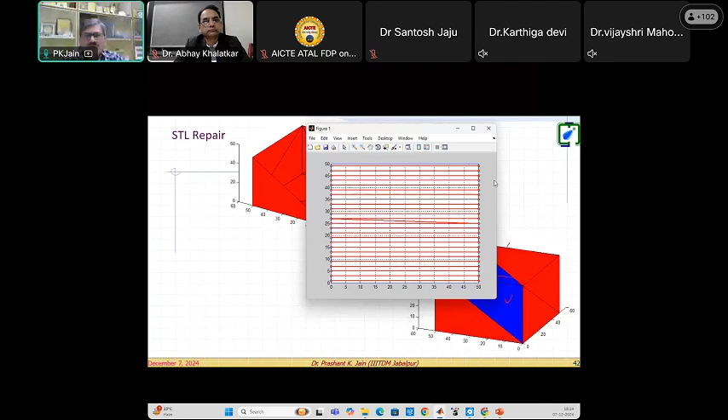Right, so this is how we have done the slicing. This is the way how you take to the slicing. This is the exploded view, you can say. And we have generated this information, all this line information, and connected them in the logical sequence.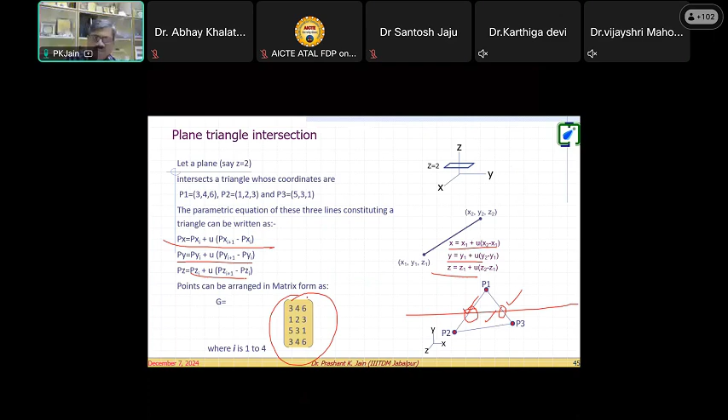Got it? So this parametric equation of line to be developed, this is taken into geometry into the matrix form for MATLAB. Then you can calculate, find out these intersection points, and you see here, these are the intersection points in top view we have got.

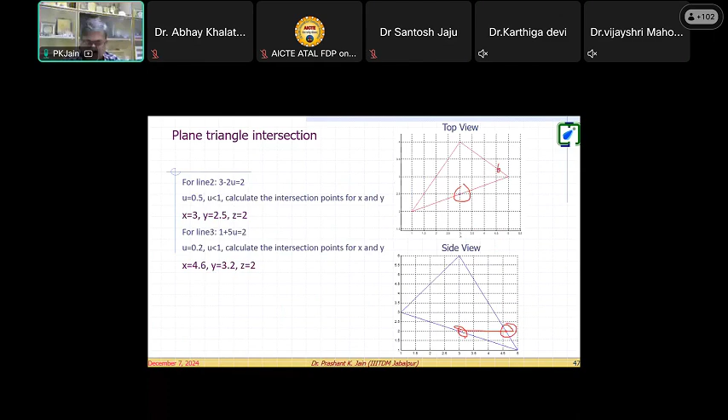So this is for one triangle. Now in your STL file, you have thousands of triangles. Once you can do this exercise for one triangle, you can take it up to thousands of triangles, no issues. So in your program, you can run in a for loop.

The next case is like this. Now this is the arrangement of the contour points in logical sequence. The first point, you see the Z=25 I have shown you. So you see here what happens. The first point is 0,25. This is connected with 0,0.

Now we will search this head 0,0 where it is available in the tail. So you see here, you find 0,0, right? This is connected with 25,0. Now we will search this 25,0, this one. You got the 25,0. So this way you connect them and you see they are connected in a logical sequence.

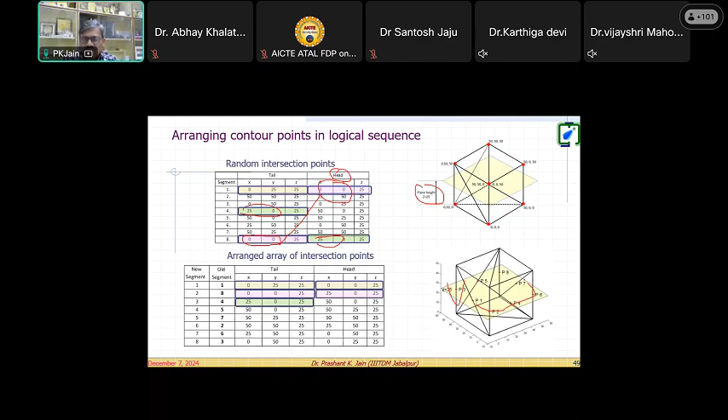So this will lead you to give the contour in a logical sequence, P1, P2, P3, P4, like this. And this will allow you to get this kind of information from P1, P2, P3, and then it will lead to the nozzle path. This information is going to be written in a CLI file for the machine use.

So what is there in the CLI file? All these contour points are there. These points in a form of XY, XY, XY written in a CLI file. You see here, this is the contour, header start, ASCII, unit, layer thickness.

Now this is layer at 50, so this is kind of 2.5D. Means you have this information and you know the layer thickness, how much it has to be extruded. So you see one contour, total number of points 5.

Then 5, x500 y0, x500 y300, x0 y300, this way it will continue. So you see here, you got the 5 points internal. Here it's only external contour. Here also the internal contour, because you see at this height you will receive the internal contour also.

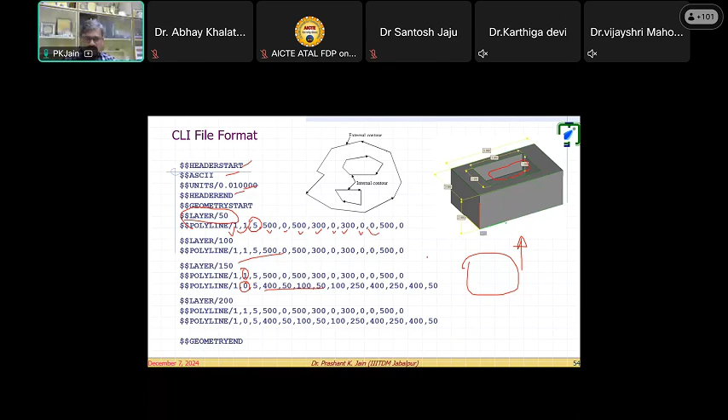So because of the time constraint, I'm not going to tell you more, this nozzle path I have already shown you. A CLI file, nozzle path, and the typical part will be like this. Now these things you can take for the biomedical application.

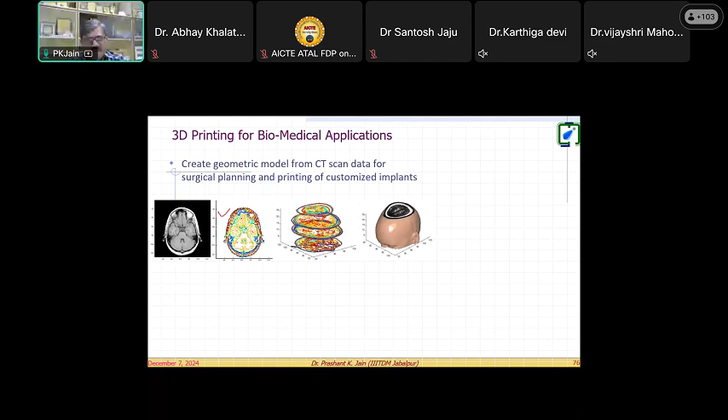You remember the X-ray, you remember the CT scan. You see here, you can import these things into MATLAB. Now you have to identify where the blood vessel or bone is, depending on the Hounsfield value. So you can see here this kind of model you can print, generate, and you can take up this rendering model for bone printing.

Even though we have developed the image processing programs, which you can directly take up to the CT scan and MRI images and get the contour information. Remember here, what is required is the contour information. So like this, you can generate this mandibular, and we have done a lot of CAD operations.

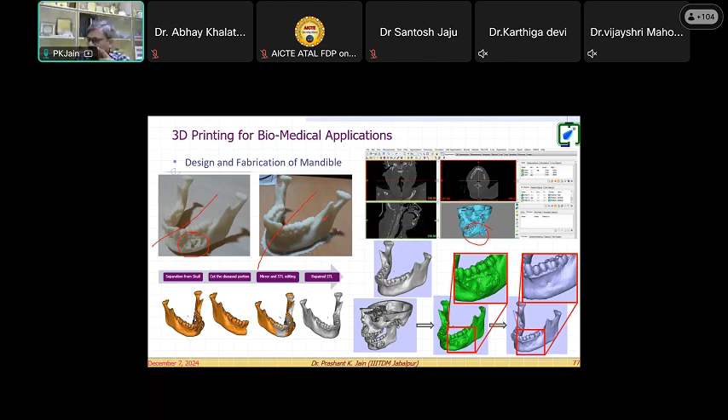So here's another example Dr. Abhay was talking about, the dentist. We have identified the root canal treatment direction. Mostly this depends on the doctor's experience - they use X-ray technique, and based on the X-ray, they identify the direction.

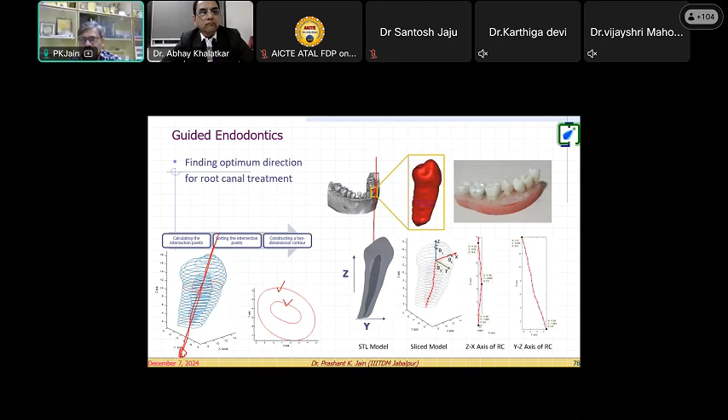So this is what we developed here - the external contour, internal contour. You remember the programming we did and how it's applied. Here we have identified this optimum direction where the doctor has to drill within the tooth. After applying this mathematical information, we find this direction for the tooth file.

Within this direction, we have developed a jig, 3D printed, which already has a hole in the particular direction. So doctors know they have to put it in this direction - this is a lot of validation. The tooth part and jig part are here. The extracted teeth are here for an in vitro study, and this hole has to be generated over here. This is the jig we created.

This is again based on the CBCT scan - a micro scan where we know the geometry of the tooth. We developed the reverse geometry and put it on this teeth, and you see here, different directions, holes are already there. So the doctor knows where and in which direction to put it. This is an assisting device or assisting method for the dentist.

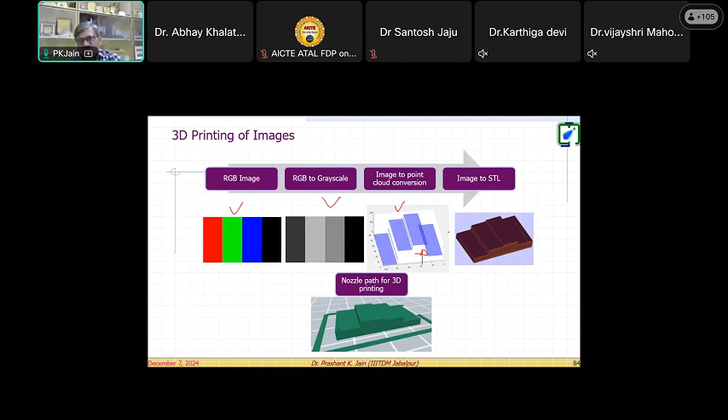This is a recent one we've done to develop 3D printed images. You remember the grayscale and binary images? What we've done here - RGB image converted to grayscale image, then image to point cloud conversion. We've given the third dimension based on the grayscale image, so this image now becomes a 3D image.

This is the fundamental, and you see its result - RGB image, grayscale image, STL file generated. This is the nozzle path, and these are the printed images.

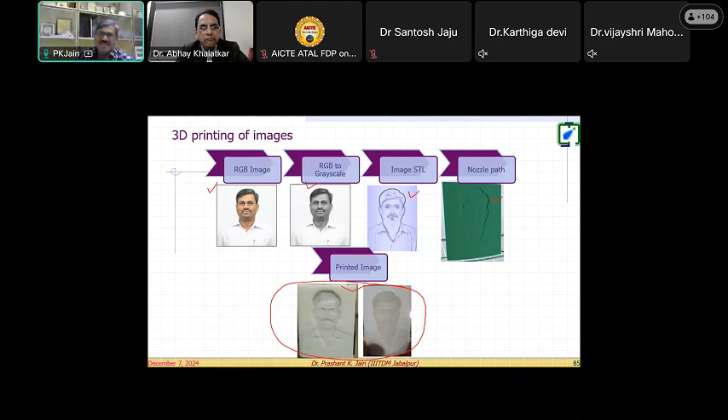You can't rely on open source software, because open source is developed by people like us also - our students or somebody doing practice, developing open source software. Okay, we'll skip these things.

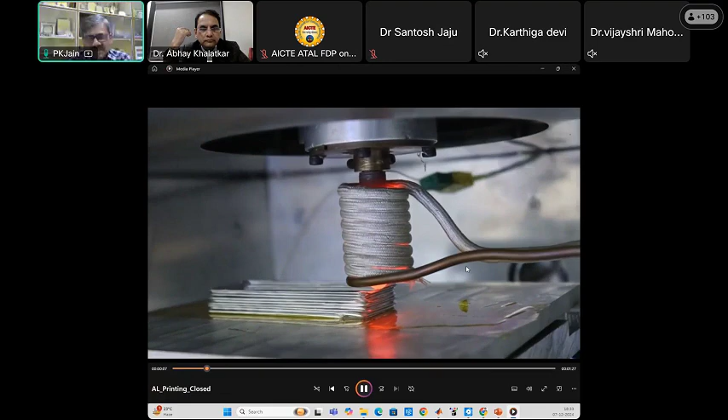Right now we are working on metal additive manufacturing and aluminium printing. Let me show you a small video of this printing. Notice here, just like fused deposition modeling, this machine is printing the aluminium.

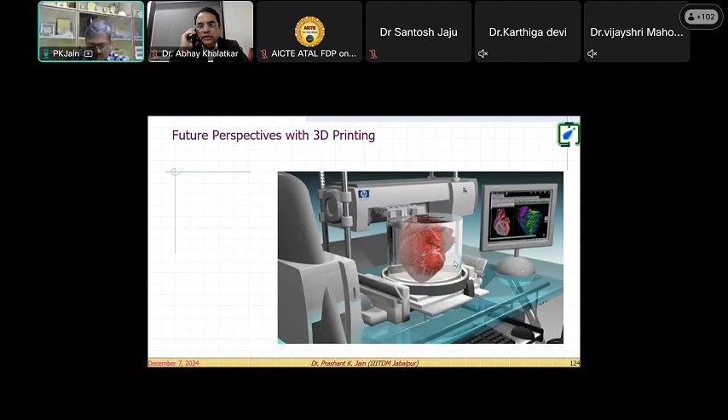Right now I'm not going into details, and we can conclude the session with the hope that the future will be in 3D printing, which will take us to organ printing. You are sitting in Nagpur already listening to many experts working directly on organ printing, medical field people. With this, we can close this session. I'm thankful to the organizers for this opportunity.

So we will connect around 7:30. Yes sir, okay, we will connect, because right now there is a feedback and test. Fine sir, I will join at 7:30. I will keep the system on and everything connected right now. And just leave for the lab and come back to my office again at 7:30. Right, thank you so much, sir. Thank you so much. Okay, thank you, thank you.